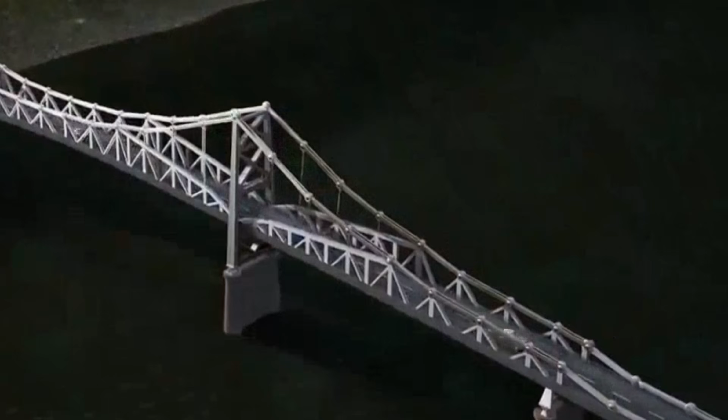There is a softness to crossing a bridge that makes you stop paying attention. You do not think about the steel over the water, or the weight of every car packed in around you, or the cold river moving underneath. You trust it the way you trust the ground.

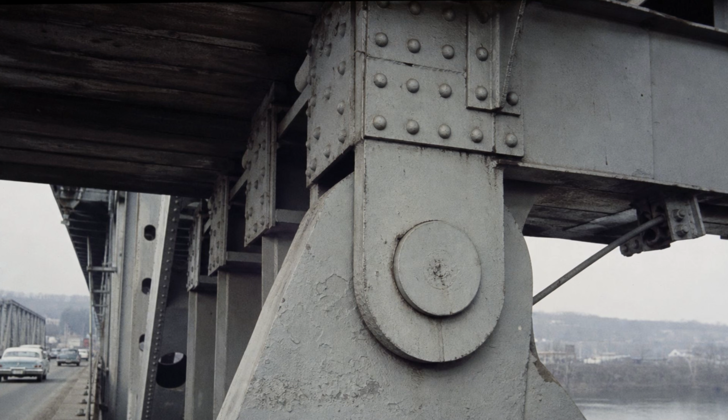On a December evening in 1967, 4,000 people a day trusted a bridge over the Ohio River. It was already failing, and no one alive could see it. That bridge had a name that sounded like a promise. They called it the Silver Bridge for the aluminum paint that made it shine over the water, and it carried U.S. Route 35 across the Ohio River between Point Pleasant, West Virginia, and the Ohio shore near Gallipolis.

It opened in 1928 to a town that was proud of it. For 39 years, it did exactly what a bridge is supposed to do, which is disappear. People drove across it without a thought, the way you cross any bridge you have crossed 1,000 times, and it held.

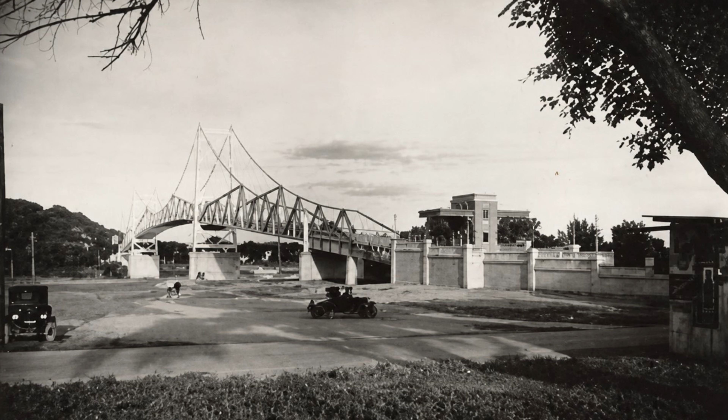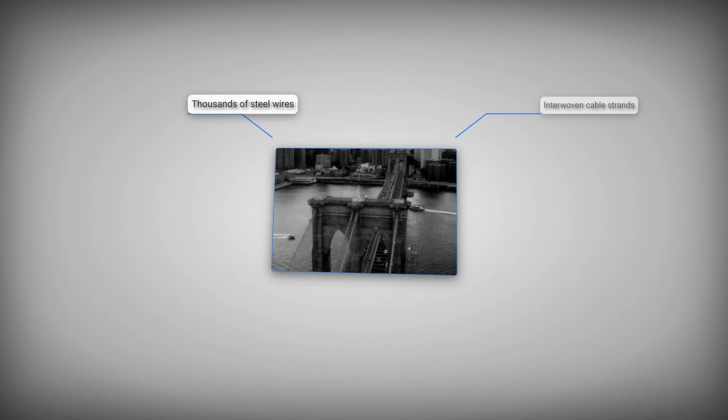Let's get into it. Here is the part almost no one knows. The Silver Bridge was not old-fashioned. It was cutting-edge. Most suspension bridges of its era, the Brooklyn Bridge among them, hung their roadway from cables spun out of thousands of individual steel wires, so that no single wire mattered much. The Silver Bridge did something newer. Instead of woven cable, it used a chain.

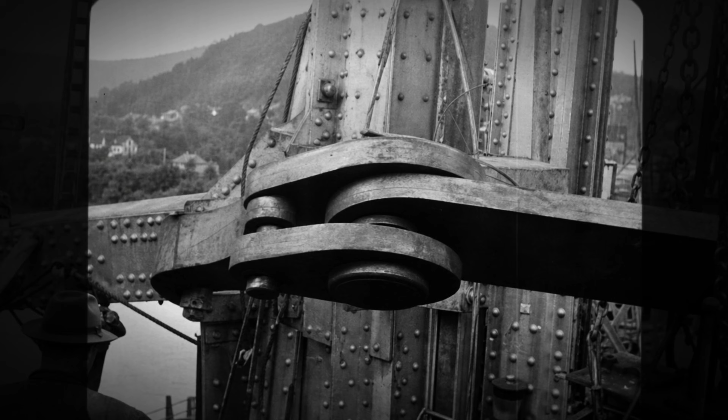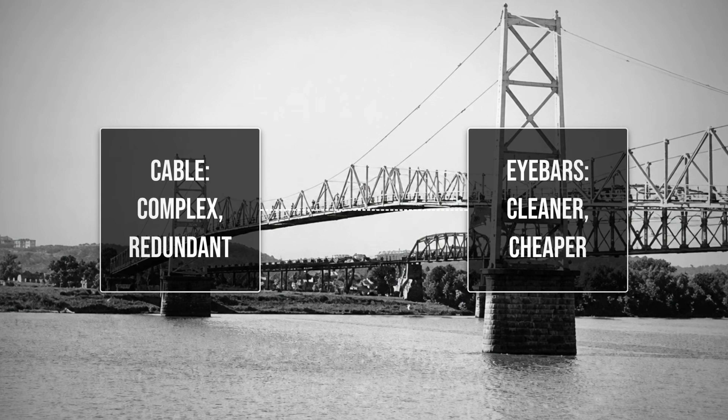Long, flat bars of steel, called eye-bars, each around 2 inches thick and a foot wide, with a rounded loop at each end. The loops were slipped over big steel pins, link over link over link, the way you'd build a chain of paper clips, except each link was a slab of steel the length of a school bus. It was one of the first bridges in the United States built this way, and it was cheaper and cleaner than cable. On paper, it was a triumph.

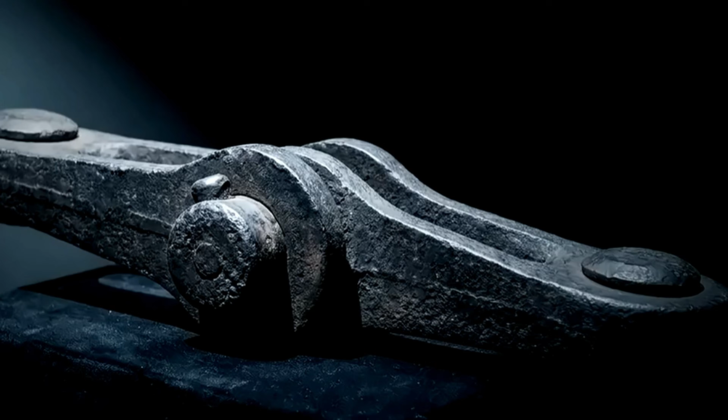The elegance is exactly where the danger was hiding. The steel in those eye-bars was a new high-strength alloy, more than twice as strong as the ordinary steel of the day. And because it was so strong, the engineers realized they didn't need many bars per link. Older eye-bar bridges stacked 4, 6, sometimes more bars side by side at every joint, on purpose, so that if one bar ever cracked, the others beside it would quietly pick up the load and the bridge would keep standing.

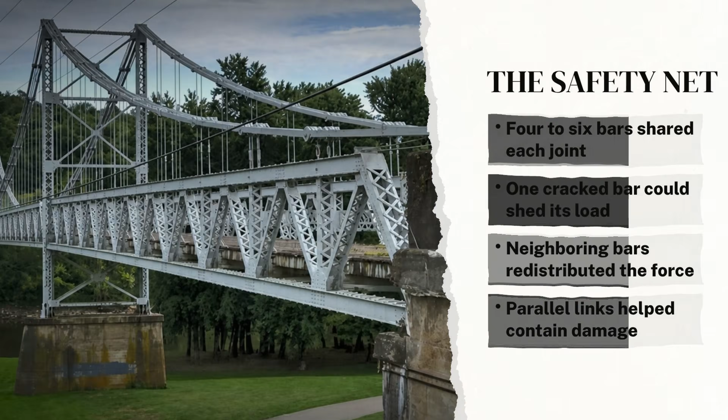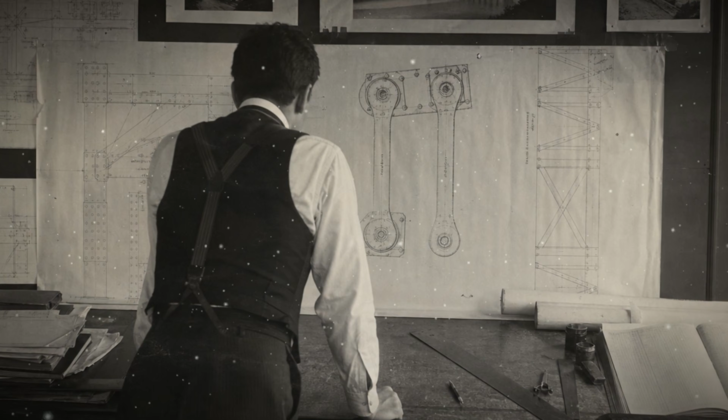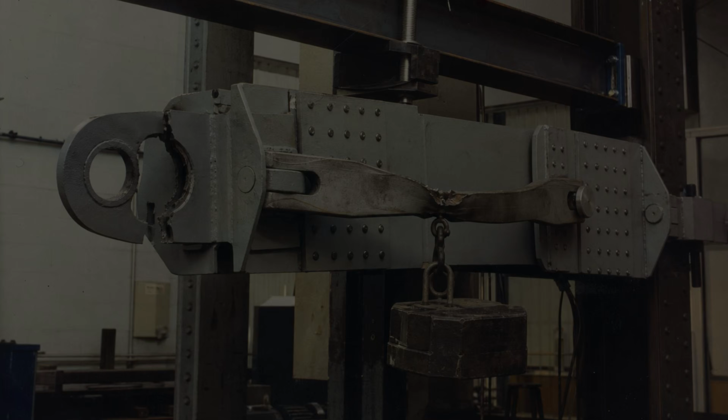The Silver Bridge used just two bars per link. It didn't need more to hold the weight, so it didn't have more. And in that single, reasonable, money-saving, entirely invisible decision lived the flaw that would kill 46 people. With only 2 bars sharing the load, the failure of one didn't mean a wounded bridge. It meant the other bar was instantly, catastrophically overloaded. There was no backup. There was nowhere for the danger to go but straight down.

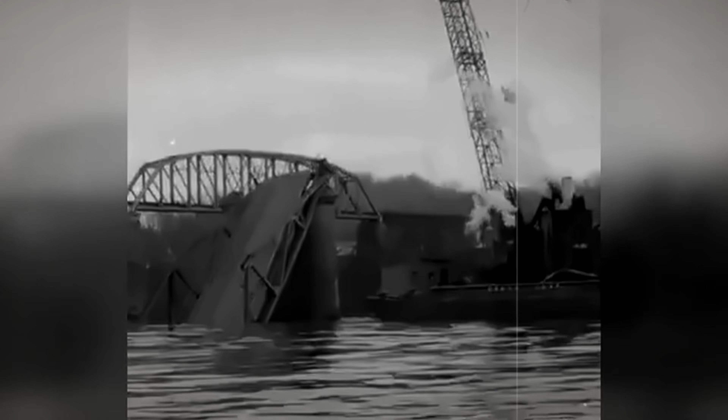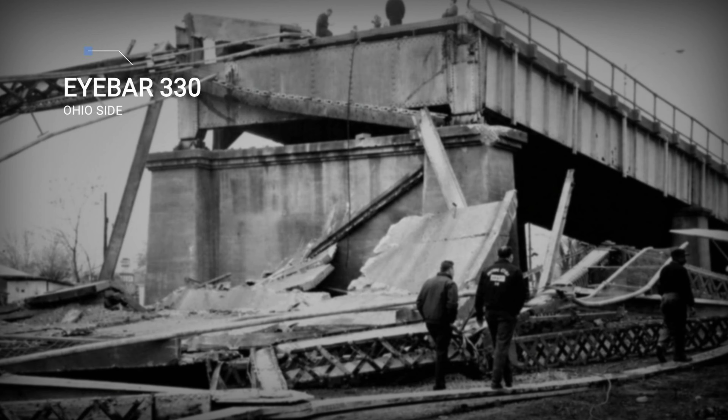Now, the flaw itself. When investigators finally pulled the wreckage out of the river and laid it across a field piece by piece, they traced the entire collapse to one link, one bar. Its designation was eye-bar 330 on the north chain, on the Ohio side of the river, the first link below the top of the tower. And inside the loop of that one bar, they found a crack. It had been there almost from the beginning.

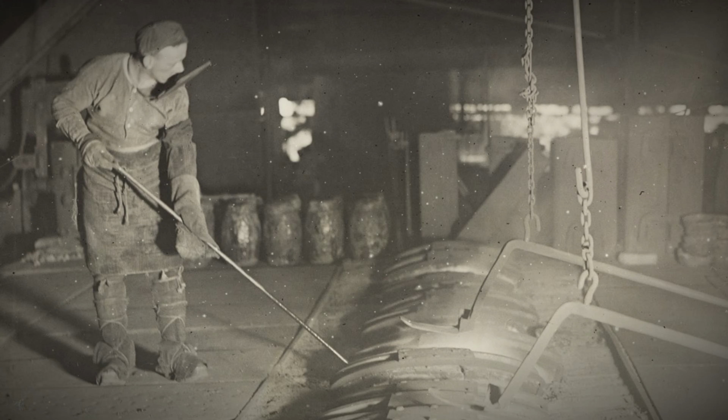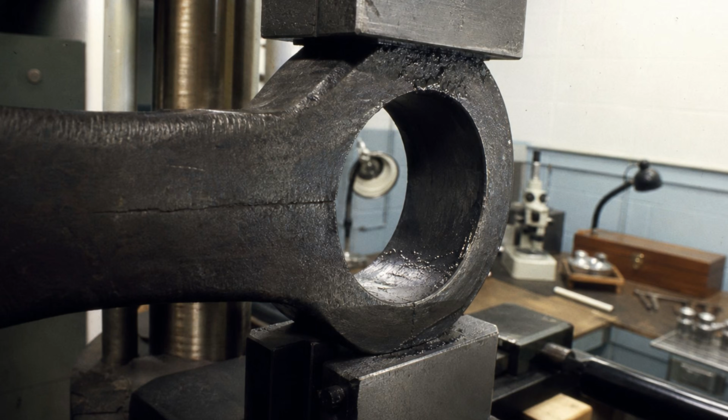A tiny defect left in the steel when the bar was cast back in the 1920s, a flaw smaller than most people would notice at all. The design of the joint let a little water pool in the eye hole, and the steel carried high built-in stress from the way it was made. And over the years, that combination did something patient and quiet and terrible. Through a process called stress corrosion cracking, the flaw grew, not fast, not visibly, a fraction of a millimeter at a time, deep inside a loop of steel no one could see into for 39 years.

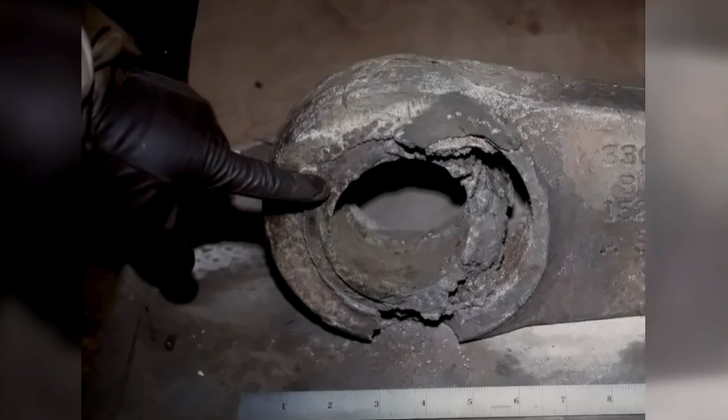When it finally went critical, the crack was about 1/10 of an inch deep, 3 millimeters, smaller than the width of a pencil. That is the entire flaw. That is what brought down an American bridge. And here is the cruelest fact in the whole story. There was no way to find it, not with the tools of the time. The crack was buried inside the eye of the bar, wrapped around the pin, invisible from every angle.

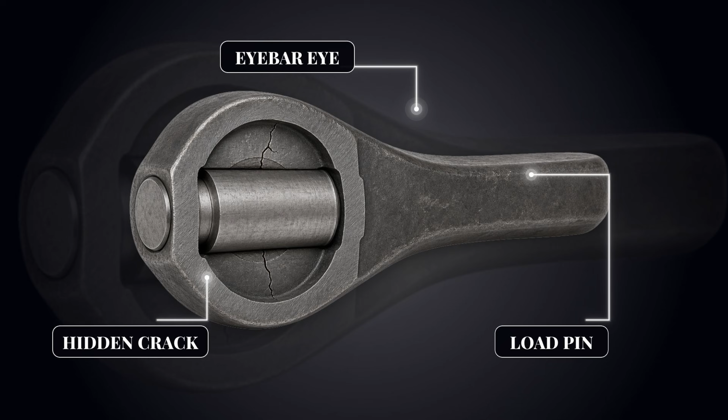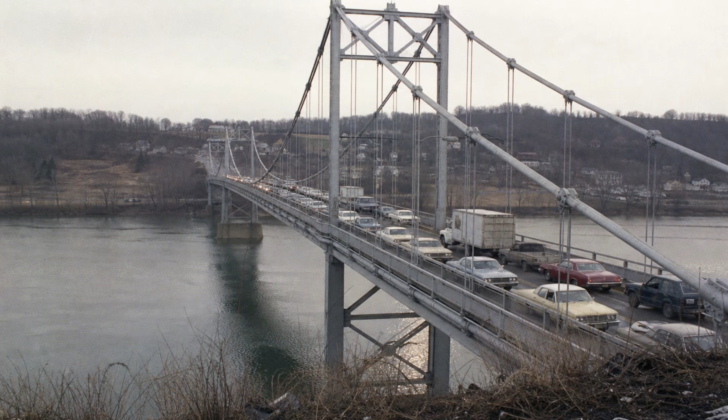The only way to have discovered it would have been to take the joint completely apart, and you cannot take a load-bearing joint apart on a bridge that is holding up rush hour traffic. Inspectors could have looked at that bar every single day for 39 years and seen nothing but sound, painted steel. The bridge wasn't neglected into failure by something anyone could point at. It was doomed by something no one could see. The bridge did not help its own case either.

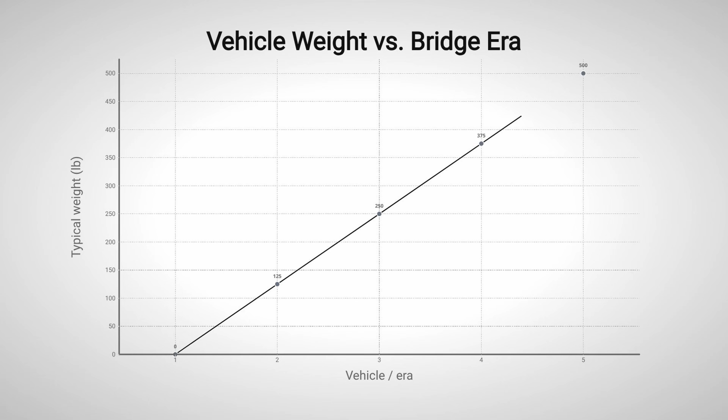It had been built in the age of the Model T when a car weighed around 1,500 pounds. By 1967, a family sedan weighed closer to 4,000, and the trucks were far heavier still, and the traffic had grown into the bumper-to-bumper jams that older design never imagined. The bridge was carrying loads it was never meant to carry, day after day, pulling harder on that hidden crack every time the traffic backed up.

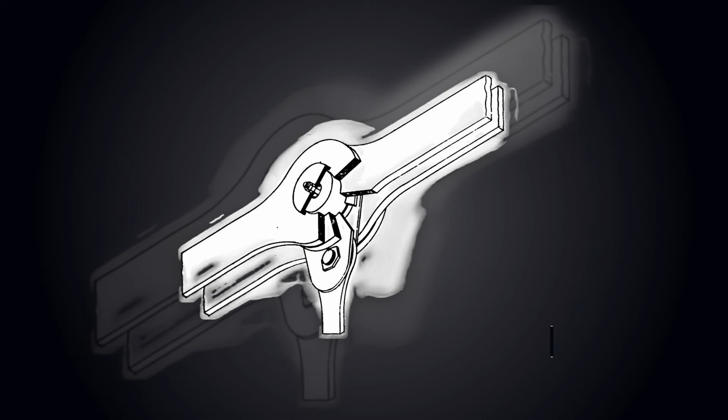December 15, 1967, backed the traffic up. It was a Friday near 5 in the evening, rush hour running straight into Christmas shopping season, and the bridge was packed nearly bumper to bumper. It was cold, right around freezing, and that mattered more than anyone standing on the bridge could have known. Cold makes this kind of steel more brittle, less able to stretch before it snaps.

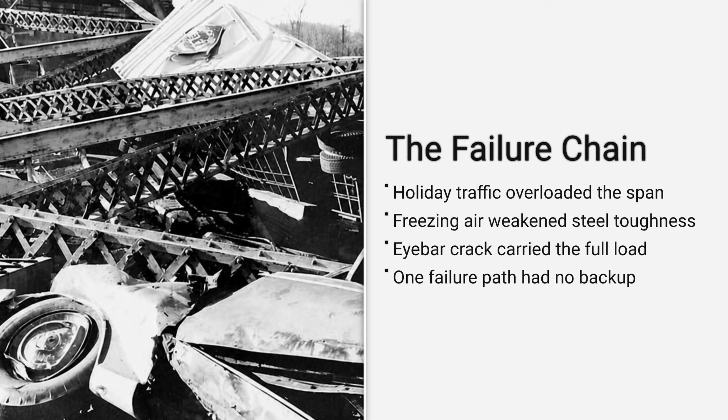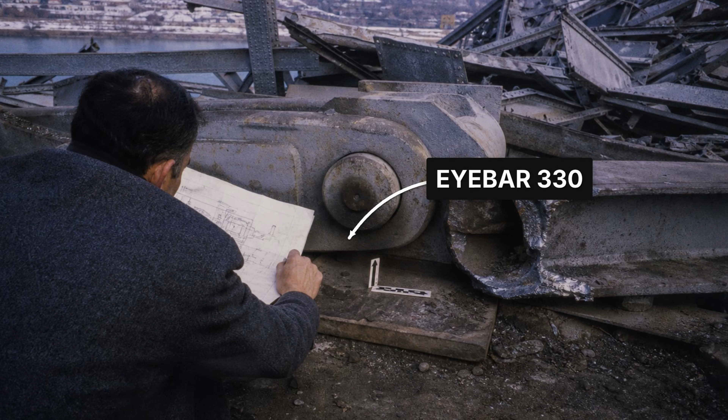So you had a bridge overloaded with holiday traffic in near-freezing air that had quietly stolen the toughness out of its steel, with a critical crack in a bar that had no backup. Every condition lined up at once. Witnesses said it sounded like a gunshot. That was eyebar 330 letting go. The crack, which had taken 39 years to grow 3 millimeters, tore across the rest of the bar almost instantly.

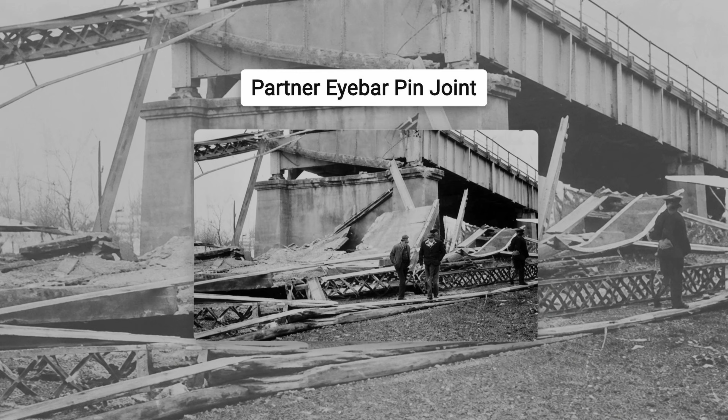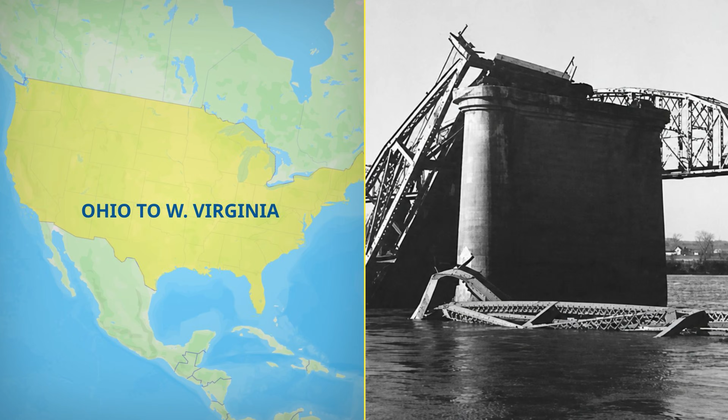Its partner bar, suddenly carrying a load meant for 2, slipped off the pin, and the chain came apart at that joint. The tower it held went unstable and toppled, and then the whole thing came down the way the survivors always describe it, like a line of dominoes, the collapse racing across the river from the Ohio side toward West Virginia. From the first sound to the last, the entire bridge, both towers, the center span, all of it, folded into the river in about a minute.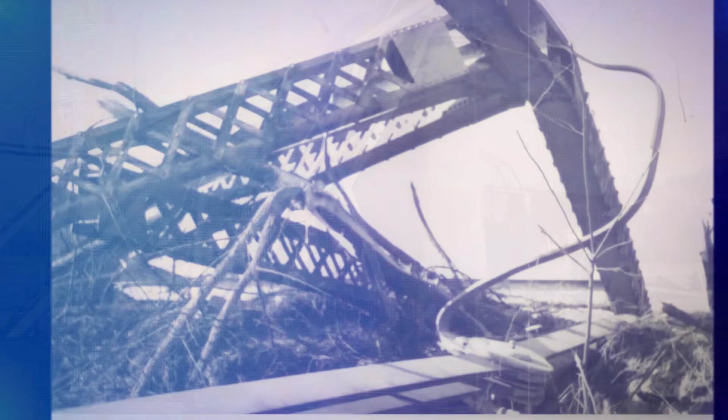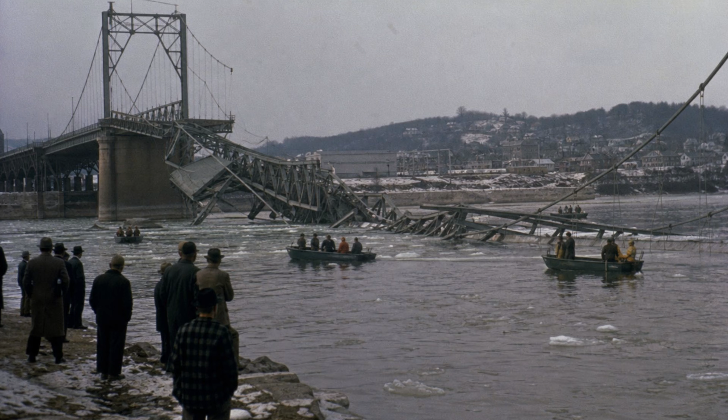31 vehicles went into the water with it, into a river that was 44 degrees. 64 people went into that cold, 46 of them died, and 2 were never found. It remains the deadliest bridge collapse in modern American history, and the thing that caused it, out of thousands of tons of steel, was a flaw the size of a grain of rice in a single bar.

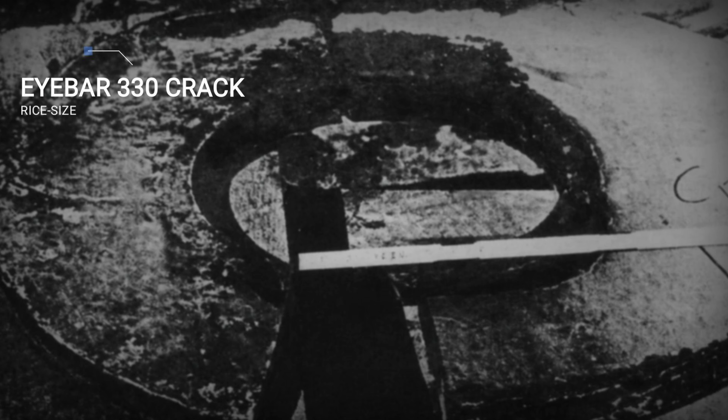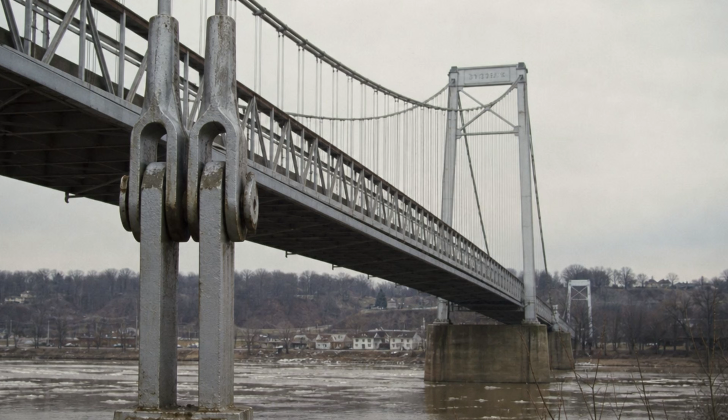The investigators put it plainly in a way that has stayed with engineers ever since. Had there been 3 or more bars in that link instead of 2, the failure of one might not have brought anything down. The redundancy that older, humbler bridges built in on purpose was the exact thing the modern, efficient design had engineered away. The Silver Bridge was too good at being strong to survive being wrong in one small place.

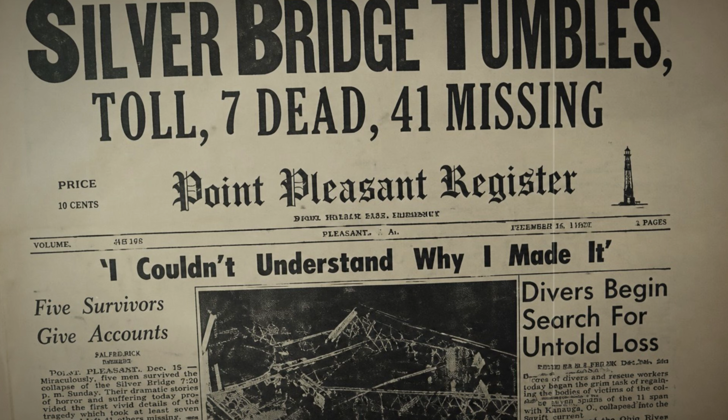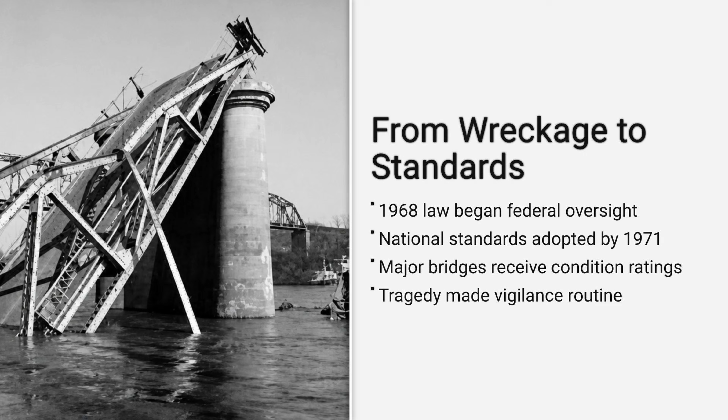The response was fast, and it was national. President Johnson formed a task force on bridge safety within days, and out of the wreckage came the National Bridge Inspection Standards, the reason that to this day every significant bridge in the United States is inspected on a regular schedule and rated for its condition. The habit you never think about of crews out on bridges with clipboards and instruments largely traces back to that river in December of 1967.

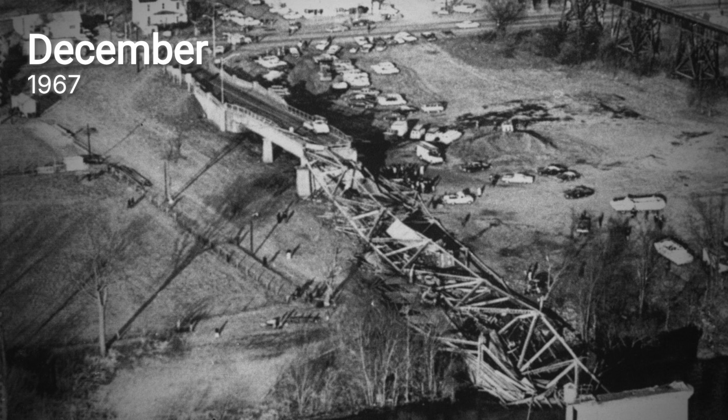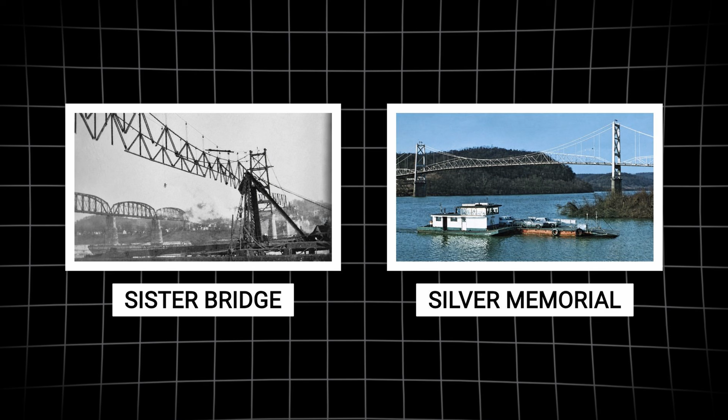There was one more shadow. Upriver at St. Mary's, West Virginia, there was a twin, a sister bridge, built by the same company at the same time, to the very same design, 2 bars per link and all. The morning after the collapse, they closed it. Nobody was willing to bet that the same hidden flaw wasn't growing in it too. It never reopened, and it was torn down a few years later. Down at Point Pleasant, a new bridge, the Silver Memorial, went up nearby in 1969, built the modern, redundant way.

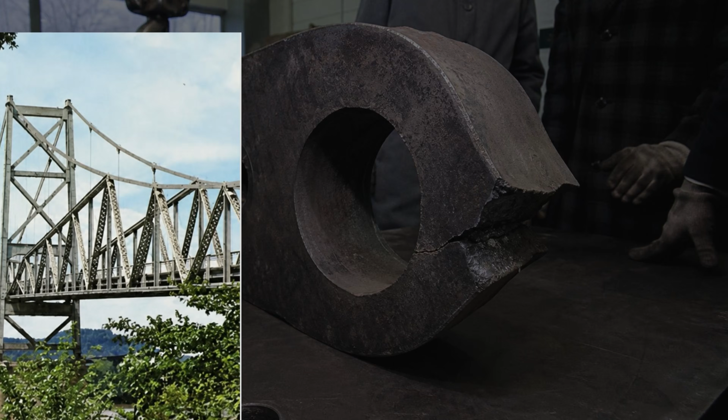And because this is Point Pleasant, there's a piece of the story that lives outside the engineering. In the year before the collapse, the town had been swept up in sightings of a winged figure people called the Mothman. And after the bridge came down, the two became fused in local legend, the creature remembered as an omen of the disaster. It's a genuine part of the region's folklore, and I'll leave the folklore to the believers. What actually took the bridge down was not a warning from the dark. It was chemistry, and cold, and a design that left itself no second chance, working silently for 39 years.

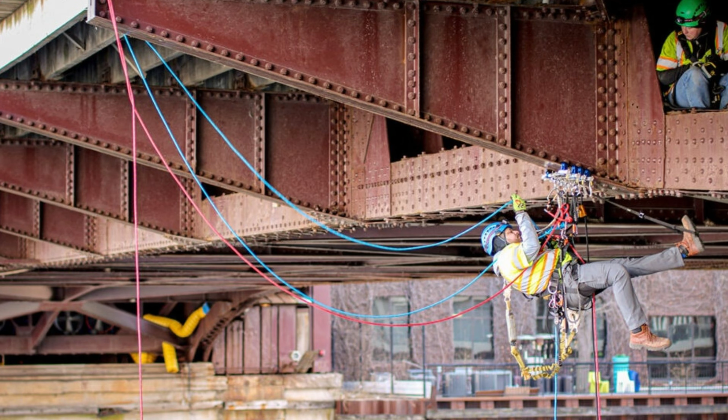So here is what this story is really about. Not fear of bridges. You will cross a dozen of them this month, and you should, and almost all of them are watched and rated and sound. It's about the gap between how solid a thing looks and what might be happening inside it, where no one can see. The Silver Bridge didn't fail because it was old or ugly or obviously neglected.

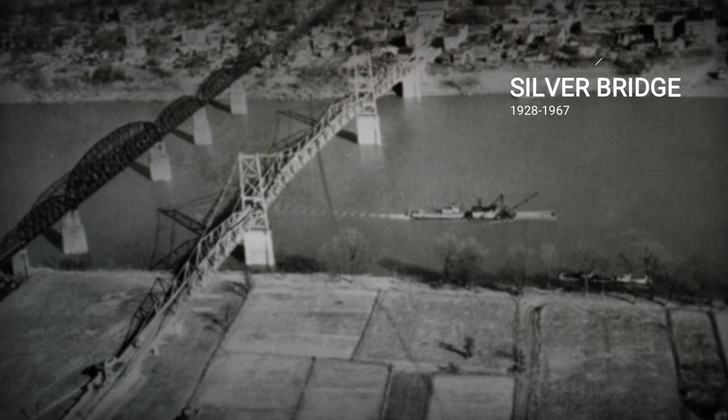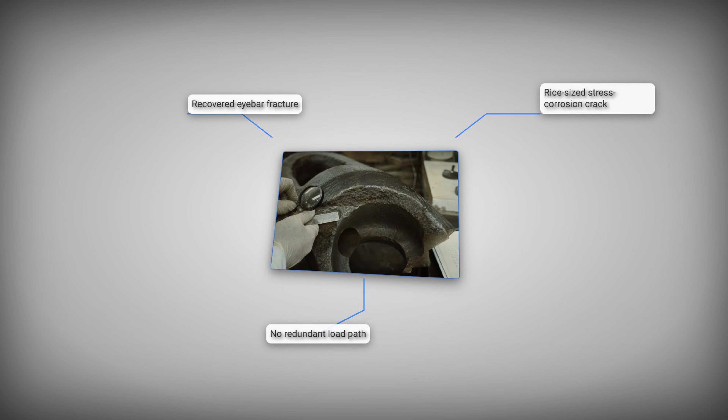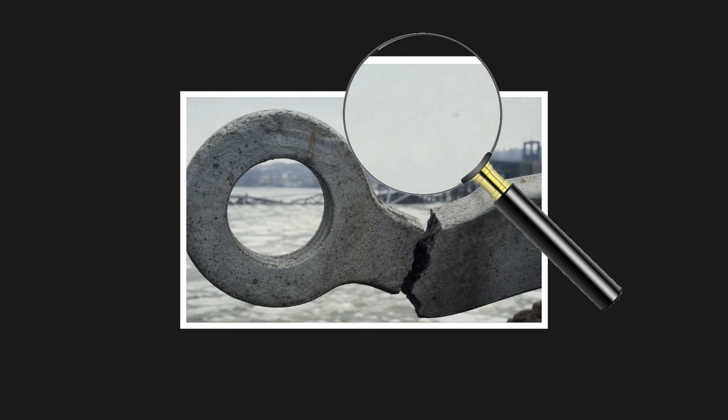It failed because it was elegant and efficient and trusted, and it carried a flaw the size of a grain of rice in one bar out of thousands, in the one place the design had left with nothing to fall back on. It held for 39 years, and it looked exactly as safe on its last afternoon as it did on its first. That is the unsettling part, and it's the part worth remembering. The surface of a thing tells you almost nothing about what's holding still inside it, waiting, the way that crack waited, quiet and patient, until the coldest, crowded evening of the year.